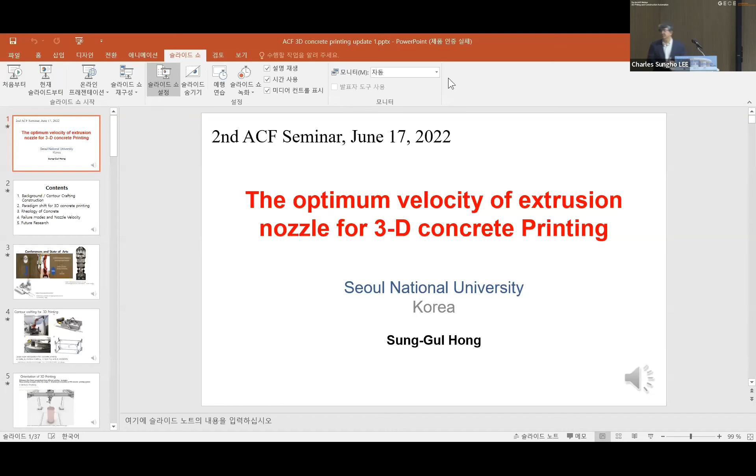Good afternoon, everybody. I'd like to talk about the optimum velocity of the extrusion nozzle for 3D concrete printing. This time, I'm happy to give you some of my research results in this ACF special seminar. My name is Sung-Gul Hong from Seoul National University.

My major interest in concrete technology is to develop high performance concrete, 3D concrete printing, and some functional materials. Today I'd like to talk about the following contents for my presentation, from the background to the future research of 3D concrete printing.

In these days, many interesting conferences have already been held. For example, Digital Concrete started almost 8 years ago. I participated in the second conference in 2020, held by Eindhoven University of Technology in the Netherlands. The conference gave us a lot of interesting technology in 3D concrete printing.

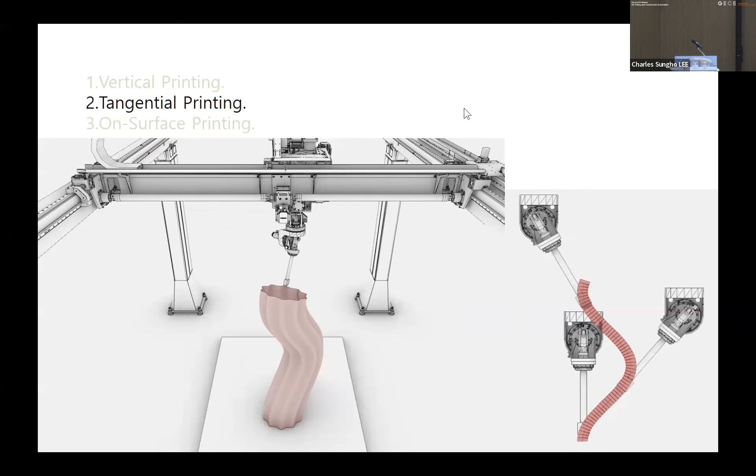Another interesting area is printing skill on curved surfaces—we need to print out to produce curved shapes of concrete material. In this case, we need to consider a more complicated problem of stability of the wall.

To solve the stability problem, we needed a paradigm shift from the normal paradigm of hardened concrete to fresh concrete. That means we need understanding of the rheology—what is the viscosity of the fresh concrete—because during 3D concrete printing, the concrete needs time to harden. That means hydration time is required to reach some strength, some stiffness. So this means a more complicated, more detailed consideration of the concrete material rather than hardened concrete.

So in the beginning of concrete printing technology, many people thought about what is the major challenge for applying 3D concrete printing in industry. They listed 5 main problems.

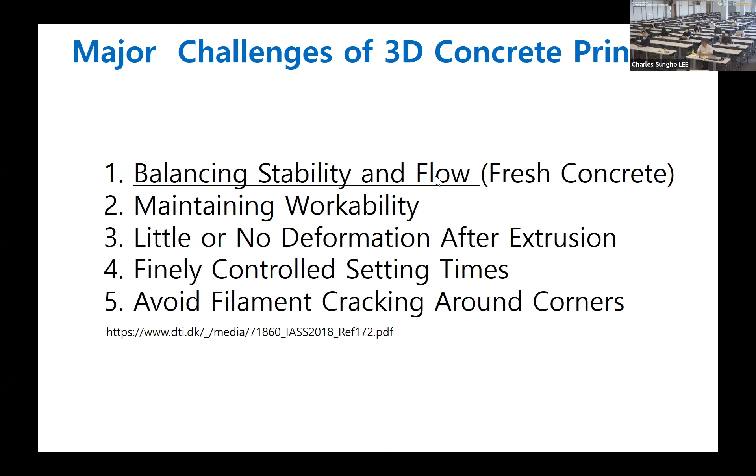So people started to discuss the stability problem as the main topic in this presentation. I'd like to talk about the rheology of the concrete.

Rheology is very unfamiliar to the ordinary concrete person, but for 3D concrete printing, we need to understand what is viscosity. Viscosity is expressed in terms of the shear rate and shear force, a kind of dynamic property.

Shear rate means the deformation divided by the height in this diagram. Up to tau zero, that is static behavior, no shear rate. After this point, flow begins, depending on the shear stress against the shear rate. The slope is defined by the viscosity.

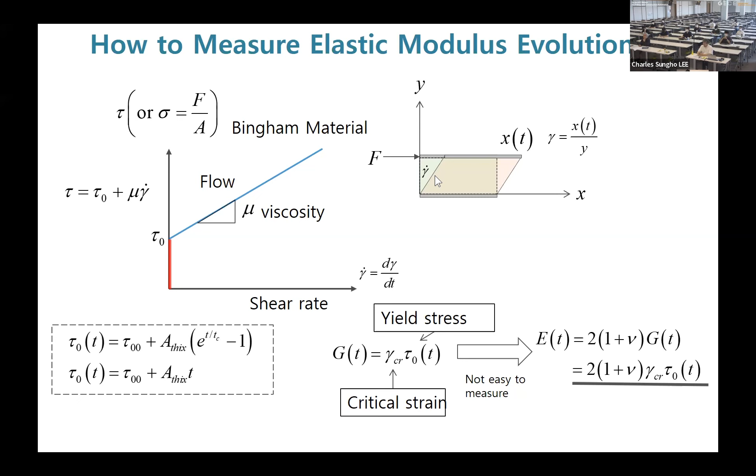From the shear modulus, applying this relationship, we get the Young's modulus. So from this equation, we can get the strength and stiffness evolution.

Here is a typical strength and stiffness evolution of fresh concrete in terms of the exponential function, with ATHX. ATHX means thixotropy, representing the total evolution of the rheological material, usually the concrete.

From viscosity and initial strength, we need to determine how much fresh concrete discharges at the extrusion nozzle. From the left side, meaning the inlet input of concrete under pressure, through some length of pipe, we assess how much fresh concrete discharges depending on viscosity.

Also, what kind of concrete affects this discharge. Here is a circular section of the pipe, and this is the center of the pipe. We have some plug flow, then some slope of the velocity profile expressed by the shear flow.

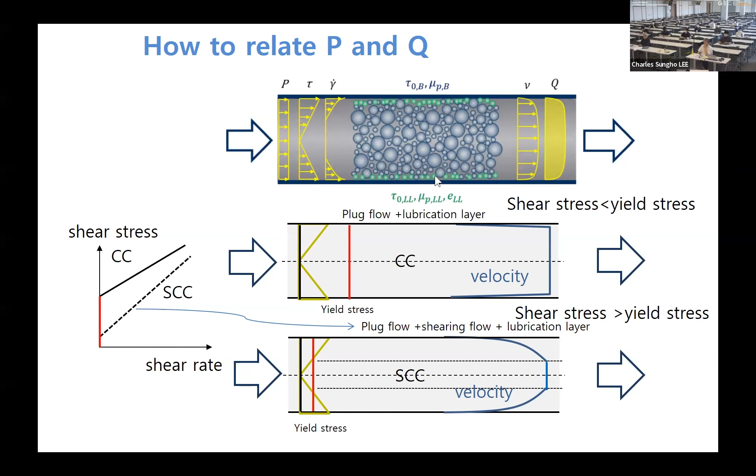In the case of only plug type and lubrication flow, we expect delta P, or Q, depends on P, but we need the initial yield stress and the lubrication flow contribution.

Another case is only the plug type; this term represents the plug type discharge.

How about the three different velocity case? That is the shear flow, the plug flow type, and the lubrication slip. So we have a little bit complicated expression between delta P and Q, giving us this complicated relationship here.

Let's move to the stability issue. We classify two types of wall shapes: one is the cylindrical or shell type wall, and the other is the rectangular wall, meaning just the plate type.

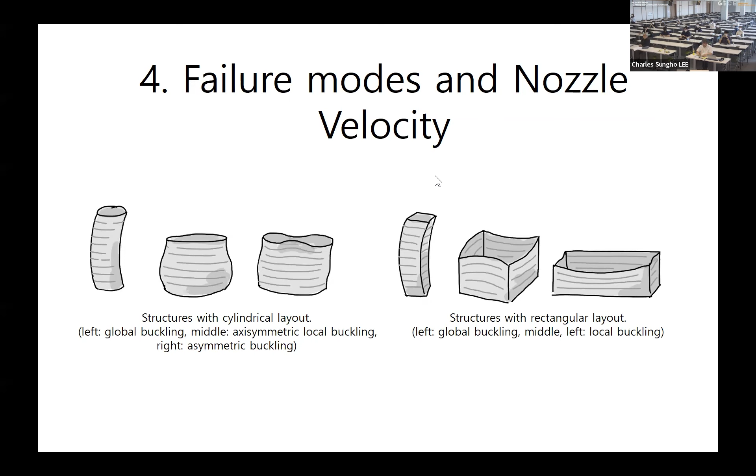These walls showed similar failure modes: global buckling, local buckling, and yielding of the wall at the bottom. In case of the plate type wall, the left side shows just buckling, and the picture shows yielding of the wall. In case of the shell, it has almost the same failure pattern of buckling and yielding.

To solve this problem and formulate the strength in case of yielding and buckling, we need an important parameter: the material property, meaning how much strength is developed and how much stiffness is developed. In case of yielding, we need the strength evolution in terms of a linear form for simplicity.

The yielding occurs at the bottom, and buckling is a more global phenomenon. We need to consider this kind of buckling shape, which can be drawn like this. But this problem also involves wall height growing over time, so we have to define an interesting parameter: the wall height growth rate.

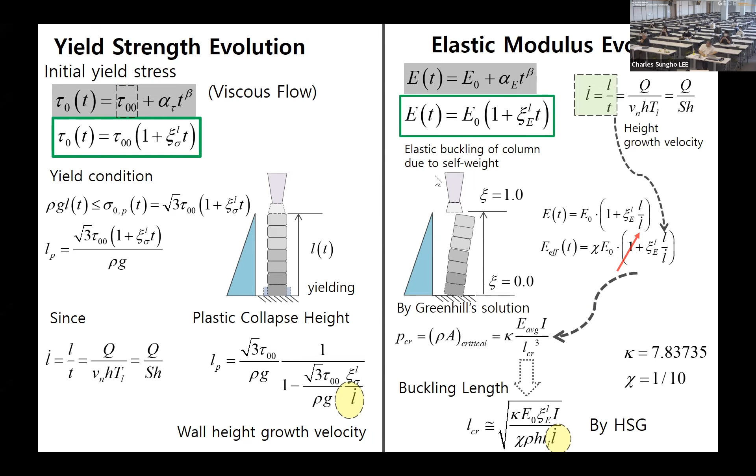We assume linear strength evolution and neglect the constant term to plug into this equation as a very approximate buckling height of the wall, expressed by this equation using modification factors kappa and xi. Xi accounts for the strength evolution, and kappa is a modification factor for the boundary condition and the elastic modulus.

Another important failure mode is the bond strength problem. In case of a very slow return period, this is not allowed because the bond failure between layers is very weak. So we have to assign a lower limit of the nozzle velocity.

To control the cold joint of the thin layer, we adopt the model proposed by previous research. The first layer is already placed here, then the second layer moves from left to right.

So tau equals mu multiplied by the shear rate. The shear rate is the nozzle velocity divided by the thickness of the two layers, giving an average velocity. That is tau xz.

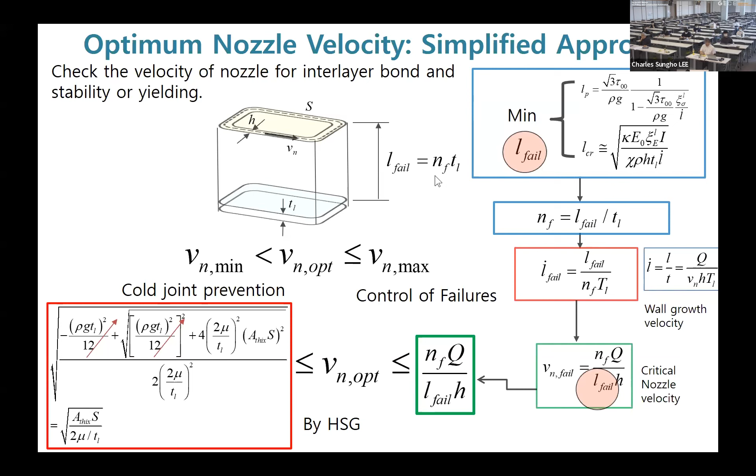Maybe we need a more complicated approach, the so-called plate buckling approach, rather than the column assumption. We assume plate buckling for the wall, restrained by elastic boundary conditions. So LC bar and LP bar take a more complicated form.

Anyway, we compare the two results using gamma. If less than this value, gamma is already given by some material property, so we determine whether buckling control or yielding control applies, whichever controls. Anyway, we can get the upper bound of the nozzle velocity.

This upper bound is controlled by NF and Q over the fail height of the wall, and also the width of the layer. Previously, for prevention of the cold joint, this equation was already derived. So the optimum nozzle velocity must be between the lower and upper bound, and this value must exist within that range.

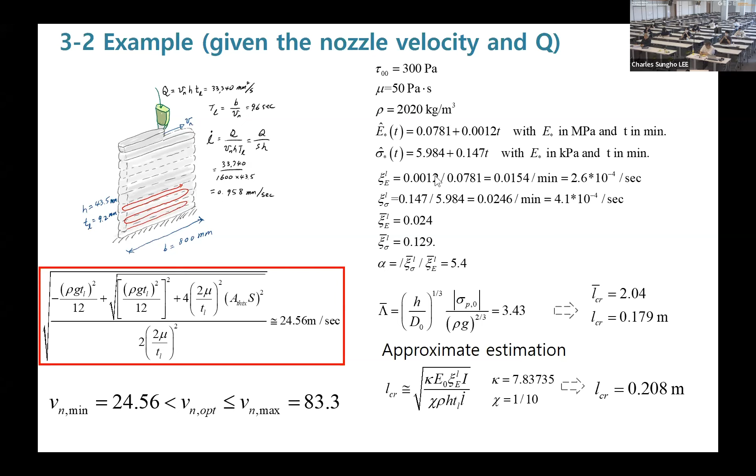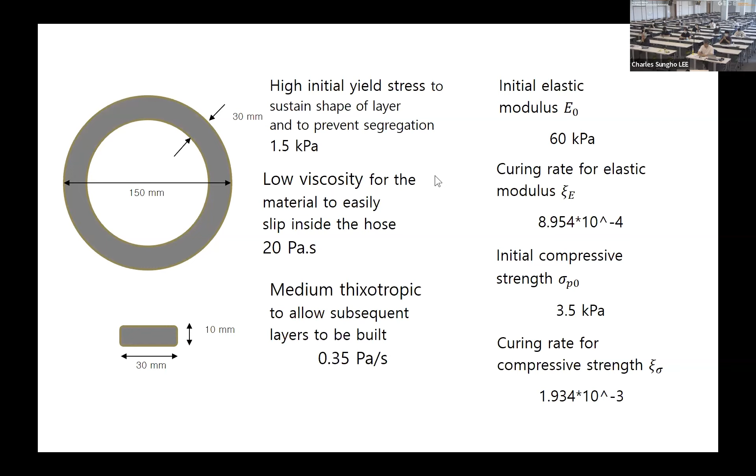So we applied some realistic case. The diameter of the shell is this value, and the thickness is 30 millimeter - so thickness is 10 millimeter. So we have the initial stress, the viscosity and the thixotropy here. So elastic modulus and the curing rate of xi E, and the initial compressive strength, curing rate psi.

Then we go to compare to the cold joint. We can have some initial design, or initial assumption of the velocity and the concrete discharge per second - discharge per second is acceptable.

Anyway, in this presentation we only focus on the stability problem, but we need more research on a large scale of 3D concrete printing to control more high quality. So we need some topology optimization. Also, we adopt robotics more aggressively to develop better quality 3D print construction.

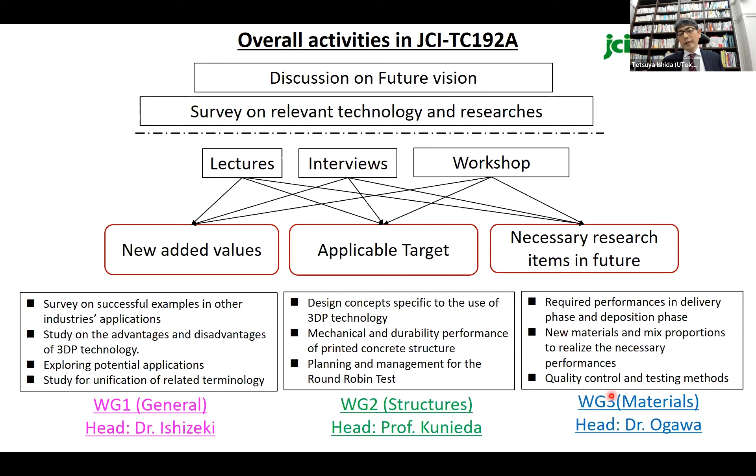Working group 3 focuses on material issues, headed by Dr. Ogawa of Taiheiyo Cement. In this working group, we try to clarify the required performance in the delivery phase and deposition phase for the material, and what new materials and mixed proportions are necessary to realize the required performance. Quality control and testing methods are also very important, so we discuss what new methods are necessary in 3D printing.

This JCI committee ended last year, so we are moving our activity to this JSCE technical subcommittee. I chair this committee, and these members are working as Secretary General and Secretary.

This committee started last June, and we plan to work for 2 years. We have 3 working groups: design and material print working, performance evaluation and quality assurance working, and contract standardization working.

The purpose of the committee is similar to that of JCI: survey of the latest information on 3D printing technology. We would also like to identify the problems in the construction of real structures using 3D printing technology.

For example, technology to control rheological properties and strength development, tensile reinforcement methods, performance evaluation, continuous material supply, securing structural stability, control at failure, etc.

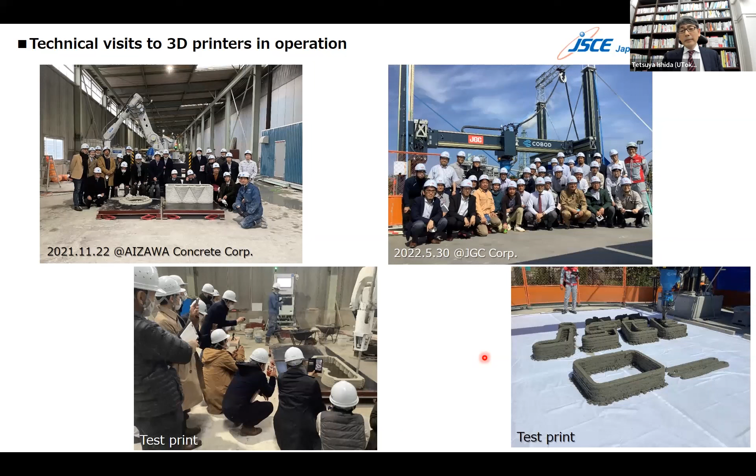Yeah, the COVID-19 situation has been getting better and better, so very luckily we can have this kind of event.

In this section, I'd like to introduce the 3D printing technologies developed by Aizawa, Obayashi, Maeda, Shimizu, Taisei, and Polyuse. Some of them very brief introduction, some of them I talk in detail.

And this is an example by Obayashi Corporation. This picture shows a shell type bench which is made with a special mortar for 3D printer and ultra high strength fiber reinforced concrete. Actually, this is self-compacting concrete.

On the left side, this is a Shimizu Corporation example. They fabricated a 3D printed concrete column, made with high performance fiber reinforced mortar outside and on-site casting, the combination of fiber reinforced mortar and conventional concrete.

And this is the concrete, printed concrete by Maeda Corporation. I think this is a smoking area.

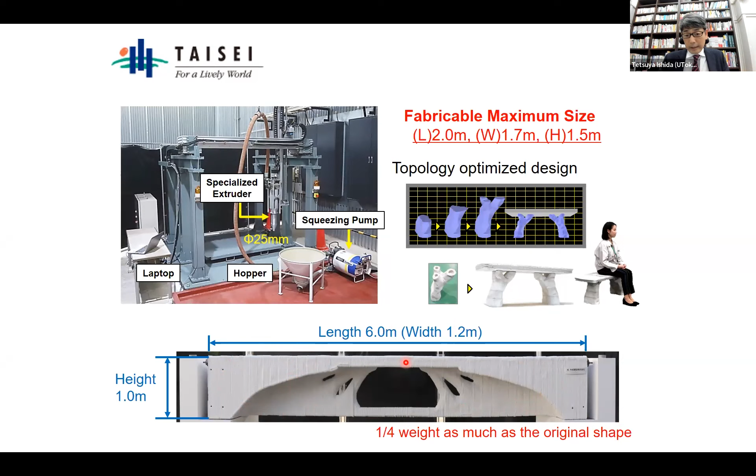Okay, I'd like to add some detailed explanation on each 3D printing technology. First one is the Shimizu Corporation. This slide is provided by Mr. Ura, thank you very much. And yes, this is the flow.

Firstly, they generate print paths on the PC. According to this generated print path, the fiber reinforced mortar is constructed like this. Their material has very high thixotropy, so they can form 2-meter height in 2 hours. And the next day, the concrete can be cast inside like this.

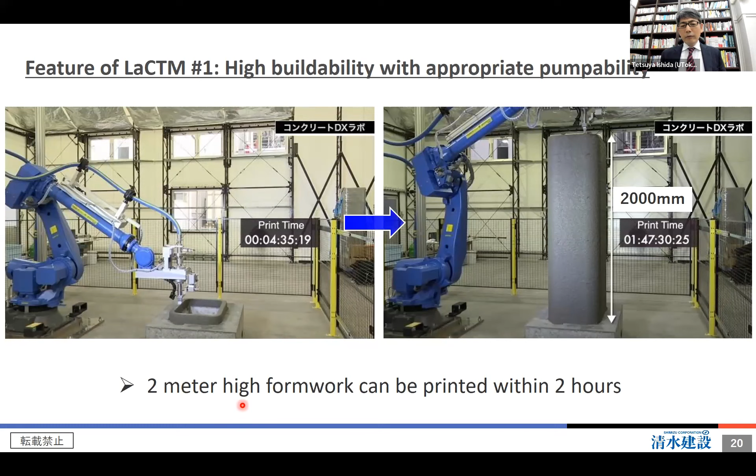The feature of this material is high buildability with appropriate pumpability. As I already mentioned, with very high thixotropy, a 2-meter high formwork can be printed within 2 hours. And this material shows very good, uniform quality.

So this is the surface. Usually, sometimes we can see some voids inside, like this, between the filaments we have some large scale void. But this is a picture of their material, and they cut the surface. You can see there is no visible void. So the cross-section seems to have no void, and this looks like very uniform material.

They conducted some water absorption tests. The left side is the 3D printed specimen, and the right side is conventional concrete. This test is called the surface water absorption test, SWAT, which was developed at Yokohama National University by Professor Hosoda, Dr. and some other colleagues.

In the 3D printed specimens, there's almost no water absorption, meaning a very dense microstructure, very good concrete quality is achieved. But in the case of conventional concrete, we have some amount of water absorption. This is usual, but in this case, very low water to cement ratio and very dense microstructure give very high resistance against water penetration.

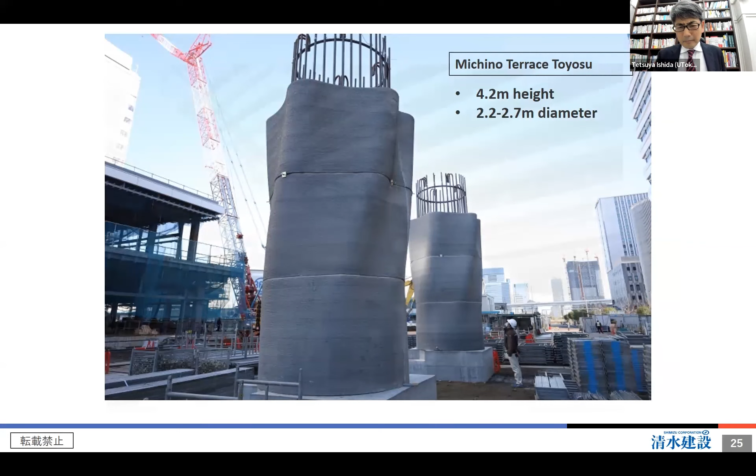So this is an example of that technology, Michino Terrace Toyosu. This is a pedestrian deck, and you can see the very unique shape of the column, which is very difficult to realize in conventional concrete.

Okay, next one is the 3D printing technology developed by Taisei Corporation. This is the introduction of their project. The background is that there have been a lot of studies, particularly on material properties and printing process in additive manufacturing and construction, but few studies have conducted structural performance testing on a large scale in a systematic manner.

This is their motivation, and the purpose of this study is a practical scale verification project in terms of structural performance. So they try to make this kind of beam.

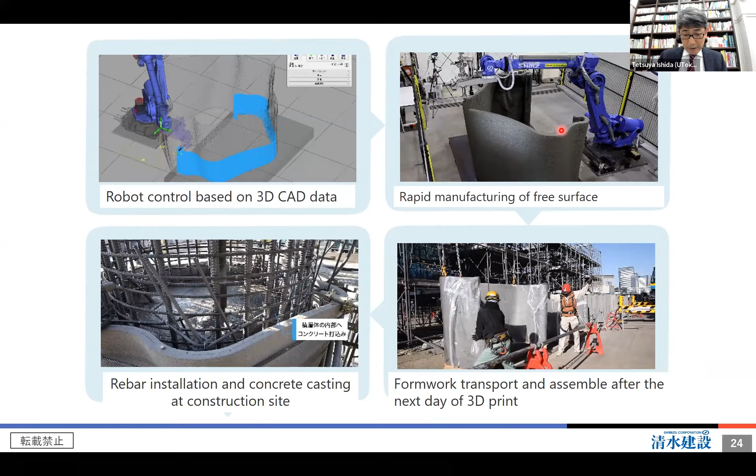Okay, so this is their printing system. I forgot to say, in the case of Shimizu Corporation, this 3D printer has been developed by their own technology, not imported from an outside company. And Taisei Corporation also developed their printing system by themselves.

And this is a gantry type 3D printer, and they try to use topology optimization. And this is a mixed design of their materials. The mixed proportion and types of binder or aggregate really depend on the company.

They use different materials. In this case, the mixed design is like this, using cement, ordinary cement, and supplementary cementitious materials, and some chemicals. And the fresh properties: mortar flow value after beating 15 times can keep about 170 millimeters for 2 hours, and this also shows very high thixotropy, so they can build this height within a short time.

As a preliminary element test, they conducted compressive strength, Young's modulus, splitting tensile strength, compressive creep, and drying shrinkage tests with core drilled specimens of the printed structure and normally casted concrete.

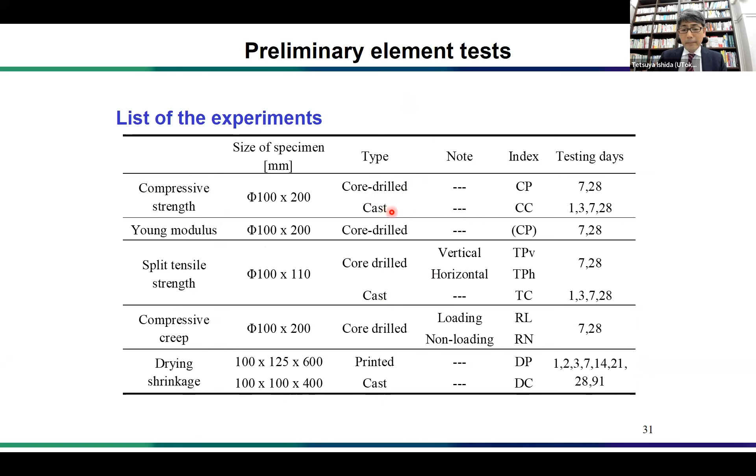This is a comparison of the compressive strength between the casted concrete and the core drilled concrete from the 3D printed members. The core sampling size is 100 diameter and 200 millimeter height, meaning this diameter includes 4 filaments, 4 layers.

From this result, you can see that casted concrete shows a little bit higher compressive strength compared with core drilled specimens. And also this is a splitting tensile test.

There are 2 series: this is vertical layer, and this is horizontal layer, and the loading direction is like this. From this result, casted concrete shows the highest tensile strength.

The second one is vertical - no, sorry, the second one is horizontal, in this direction, and the third one is the loading direction. So we can see this difference. And this is a compressive creep test.

And yes, this is a material test. By using such material data, next they design the beam by introducing topology optimization.

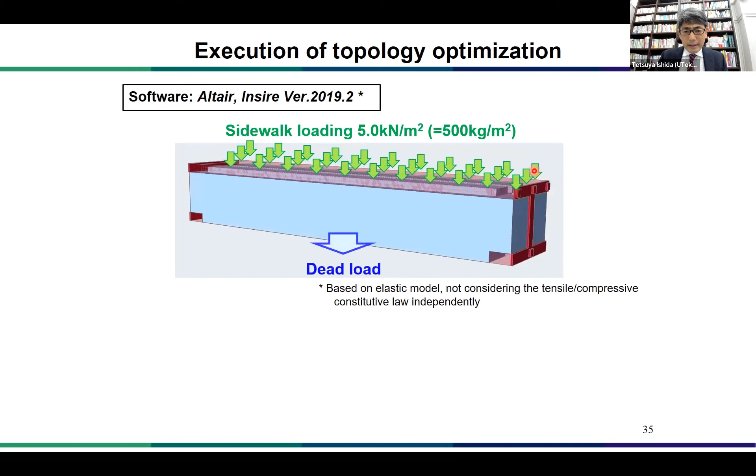But this part can be changed according to the topology optimization. They consider the external force and dead load and apply the PC stress, and can find the optimum design.

In this analysis, they just use an elastic model - no nonlinear constitutive law is considered, just the elastic model.

And finally, they can create this kind of girder with 3D printing, with a 3D printer. And next is a 3D printed pier - this is also very interesting.

In this case, similar to Shimizu Corporation, firstly they manufacture this formwork with a 3D printer, then concrete is casted inside, and finally they get this kind of pier column.

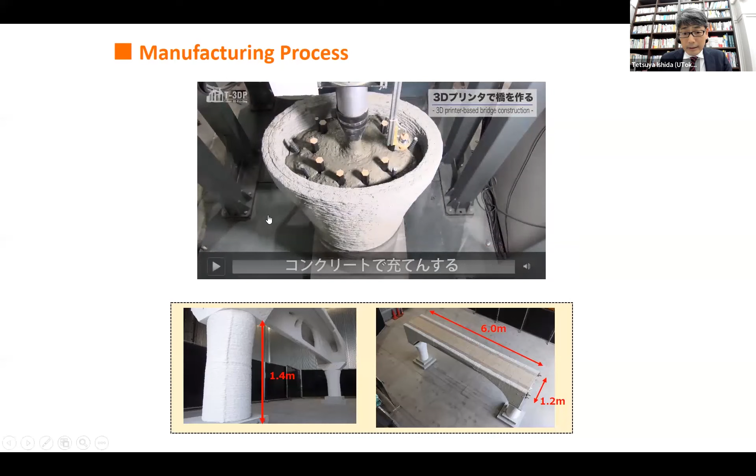Then this is a movie of the 3D printer, putting the rebar, and finally concrete is casted. And for this pier, a reversal cyclic loading test was conducted.

From this result, they realized that the outer shell and inner concrete behaved as a unity, not separately.

Also from this result, the uniaxial distribution of short fiber in the outer shell enhances the reinforcement for shear force, and also provides a confinement effect for the cover concrete, which leads to very high ductility in the case of the 3D printed outer layer. By using this kind of structural design, we can enhance the seismic performance, and I think this is a very promising technology.

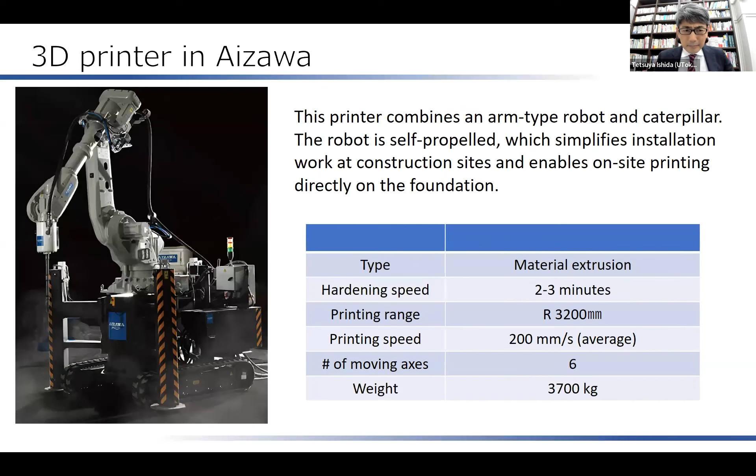Okay, the last one is a 3D printing technology developed by Aizawa Corporation. They introduced the SAIBI 3D printer, and as I already mentioned, they built this kind of toilet.

And this is the structure, and this is a movie of the printing process.

Yes, finally they built this toilet, and this is inside. They are also now planning to make glamping facilities with 3D printing. And this is a picture.

As a future work, they try to introduce new machines, and also propose a very interesting new technology that is a combination of drone and 3D printer. They call this a flying 3D printer. If this is realized, I think we can broaden the possibility of the construction process.

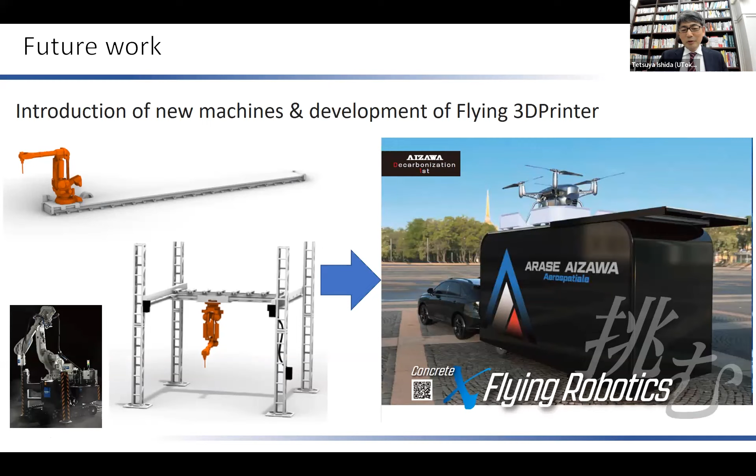This is the final one, an application example by Obayashi. This is a really new topic. Last week, they released this press news.

This is a shell-shaped bench, and this is a 3D printer demonstration building. In May this year, construction of the 3D printer demonstration building just began. It has undergone performance evaluation review by the Building Center of Japan and has been certified by the Ministry of Land, Infrastructure, Transport, and Tourism.

A 3D printer will be installed at the construction site to print the walls, the slab is constructed, and it's filled with slimcrete. This is also their own developed material, self-consolidating, self-compacting concrete, very high strength concrete. So it's a combination of 3D printed material and high strength self-consolidating compacting concrete.

This is a multi-layer overview of the structure. This is a 3D printed concrete member, this is an insulation layer, and this is the equipment layer. This is also very unique.

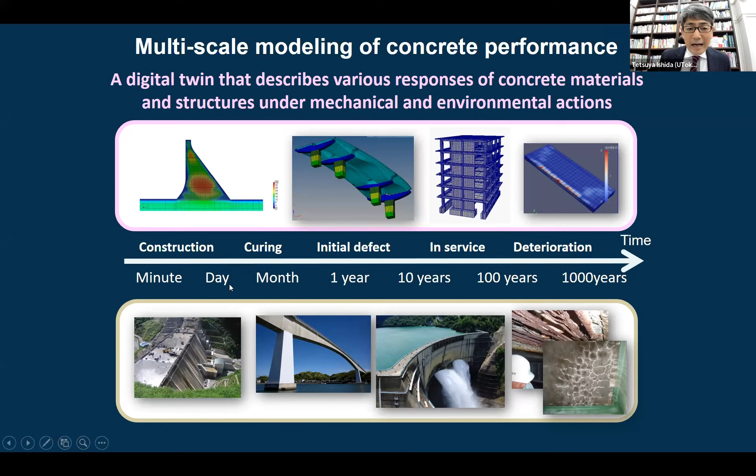Our core technology is numerical modeling and numerical simulations. I have been working with Professor Maekawa and Professor Okamura, and we have been developing this kind of numerical multi-scale modeling, multi-physics modeling. By using this technology, we can simulate the performance of materials and structures from the very early stage to the long-term deterioration process.

In my opinion, I'd like to combine this kind of numerical model with 3D printed materials, but due to the limitation of time, I'm going to skip this. This is also interesting, but I may need to skip it too, sorry.

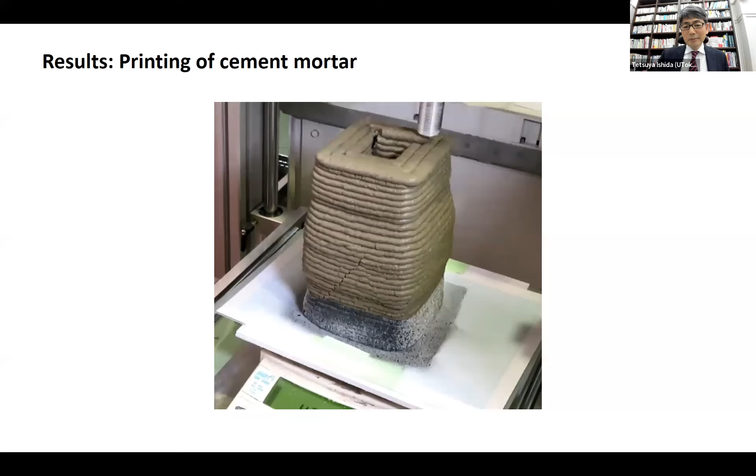In this project, we use DIC, digital image correlation. By using DIC, we can very nicely detect the sign of collapse of 3D printed materials, like this. With the naked eye, we cannot detect the defect, but DIC can detect it. So we think we can use this kind of technology in a real-time monitoring system.

We now also develop metamaterials with 3D printing technology. What determines structural performance of concrete? Of course, it depends on material properties and structural dimensions. With regard to material properties, we have many possible combinations, like types of binder, aggregate, or fiber. But with regard to structural dimensions, the possible shapes and sizes are limited by formwork. Therefore, higher freedom of structural design would broaden the possible range of structural performance.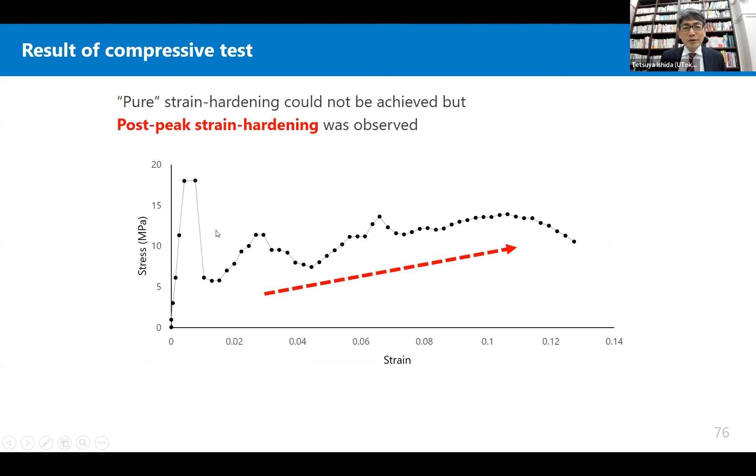We try to make this kind of very unique structure with cementitious materials, and we apply the load. Then we can see very interesting results. Of course, pure strain hardening could not be achieved, but post-peak strain hardening was observed by making this kind of structure.

Firstly, we have a crack like this, then stress reduces. But after that, holes close, then stress increases again. Then we observe the next different crack, and again holes close, then stress increases. As a result, we can achieve very high energy absorption.

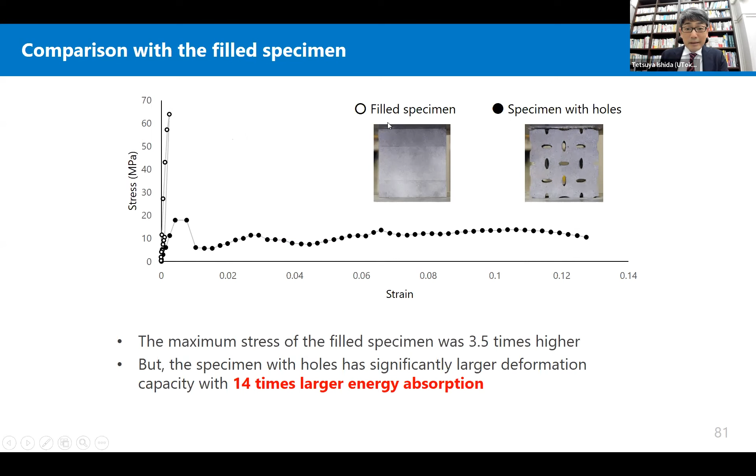This is a filled specimen, and this is a specimen with holes. This is really a preliminary study, but by changing the internal structure with a 3D printer, we can create new materials, and we'd like to realize this metamaterial in the future.

I'm sorry, due to the time limitation, I cannot finish everything, but thank you very much for your kind attention. Thank you.

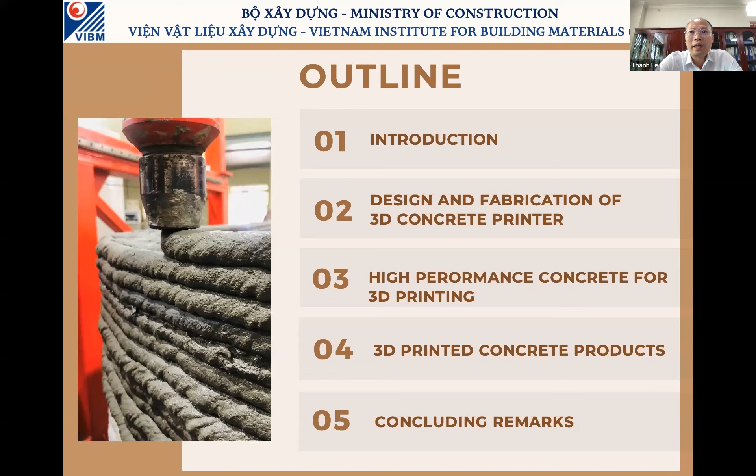In this presentation, I'll bring you 5 contents. The first is a very short introduction, then I'll move to the second content on design and fabrication of a 3D concrete printer in Vietnam. The third part is high performance concrete for 3D printing. The fourth content covers some products we've printed using our 3D printer with high performance concrete. And lastly, we'll have some concluding remarks for discussion.

VIBM, the Vietnam Institute for Building Material, was founded in 1969, and we are a National Science and Technology Research Institute in the field of building material, construction material, construction environment and infrastructure. We assist the state management and nation-wide development of the building material industry, construction environment and infrastructure for the Vietnam government, directly under the Ministry of Construction.

So concrete research is one of our key research areas.

Basically, 3D printing is an additive layer-based manufacturing technique. You might already know some very basic steps for 3D printing. The first is 3D modeling - objects are designed using 3D modeling software, which is very popular now. Then it needs to be formatted as an STL file, giving information on coordinates and boundaries. After that, it should be sliced into layers with the same height, converted to G-code, and transferred to the printer for printing the material. The material should be high performance concrete, extruded and bonded in layers to form the object component.

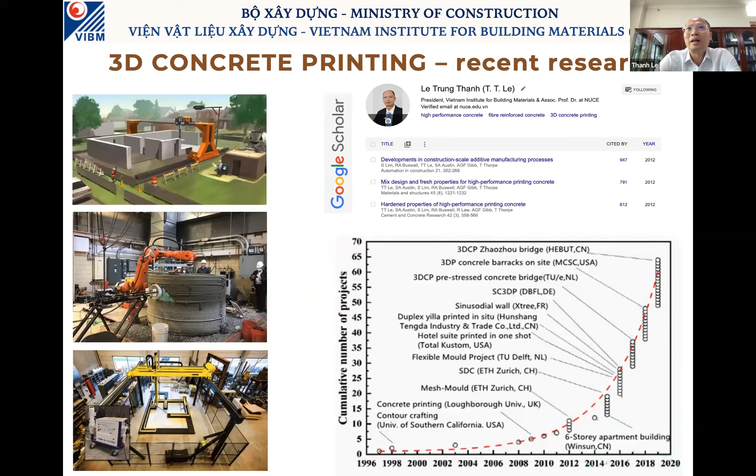We agreed with each other on some key points for designing a concrete 3D printer: it should be a large 3D printing system using a gantry system to control the position of the nozzle according to the X, Y, and Z coordinates, using concrete 3D printing technique by extruding cement concrete material through a nozzle to print concrete layer by layer. This type of design is basic, simpler, more powerful than other options, easy to manufacture, and uses locally available components.

It can reduce the cost when building at a larger scale rather than a robotic arm. We understand that the robotic arm, which some research centers use, is very precise, but we doubt its scalability. With the robotic arm, it's very hard and inconvenient to print larger scale construction structures. So we went with the 3D gantry printer.

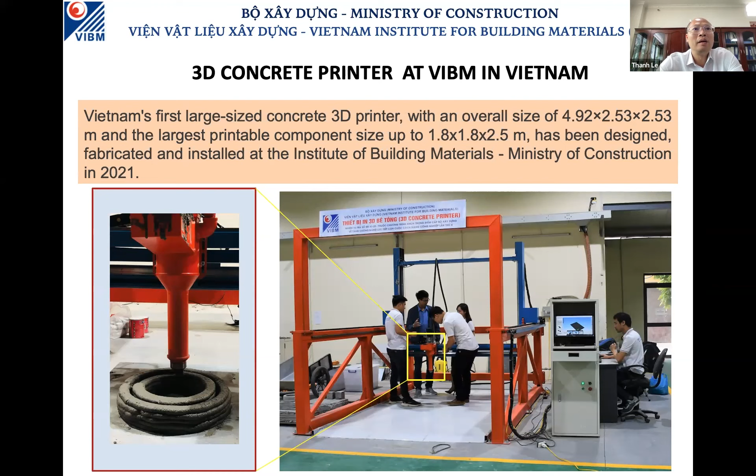We also have a control box with our own developed software, though there is some available software in the world already. We started to design components and print some of them.

Now we move to the second part, to introduce the high performance concrete for 3D printing. We use readily available normal raw materials, including cement PC40, and also PC50. Different from other countries like those in Europe which use 52.5, in Vietnam we use 50 and 40.

We use sand with a maximum size of 5 millimeters, and we also tried a maximum size of 2.5 millimeters. We also use silica fume and fly ash, which is available in very large volume in the Vietnam market now. For chemical admixtures, we tried several different ones, but we settled on one of the Sika admixtures.

The mix proportion was optimized based on some very basic criteria: workability, open time, strength, extrudability, and buildability. If you have read the paper we published 10 years ago, we define what buildability, extrudability, and open time mean. We all know that 3D concrete is a really challenging type of concrete because it should have very good fresh properties for extrusion, but it also needs good buildability.

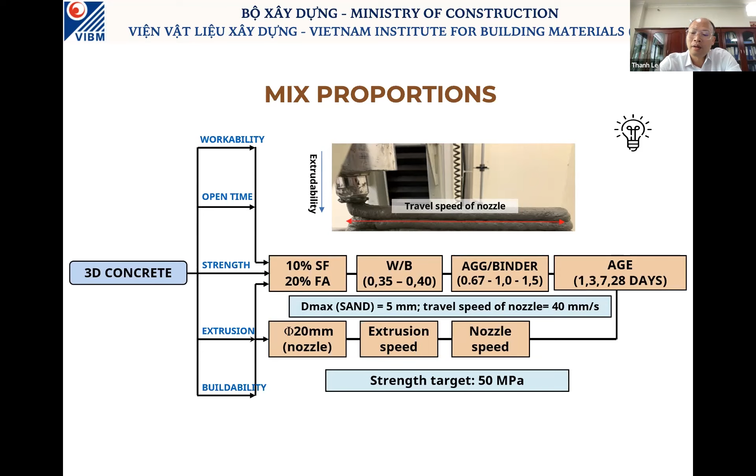The strength target was 50 megapascals.

So the method of research here, we do a lot of buildability tests. First, we use a mortar, a small mortar with a compression machine. We use equipment we developed ourselves, designed and fabricated in VIBM with a piston system, which is a simulation system consisting of a compressor and a piston to test buildability.

We did a lot of different mix proportions for optimization. We mix this, measure workability, and then put it in our measurement system for buildability. This is a piston system, a small piston.

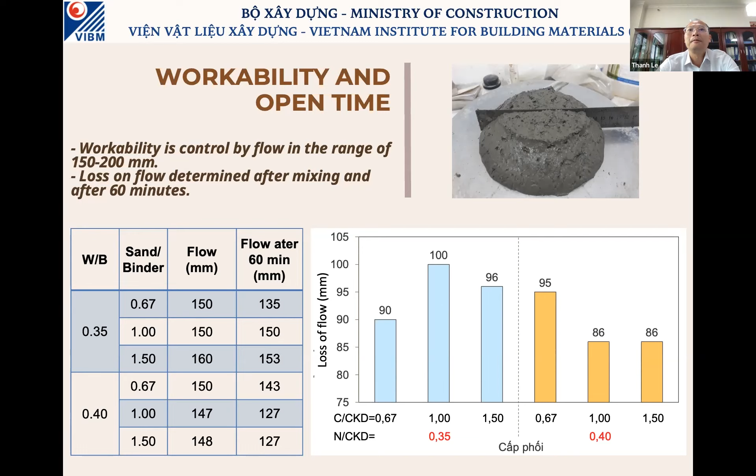For extrudability, we try to optimize by variation of speed of the nozzle, with extrusion speeds of 40, 60, 80, 100, 120, 140, 160, and 180 millimeters per second, with 20 millimeter per second intervals. The nozzle diameter we test using 20 millimeter diameter. Some mixes are not really good, and finally we find some mixes have good extrudability. The extrusion speed should be 100 to 140 millimeters per second.

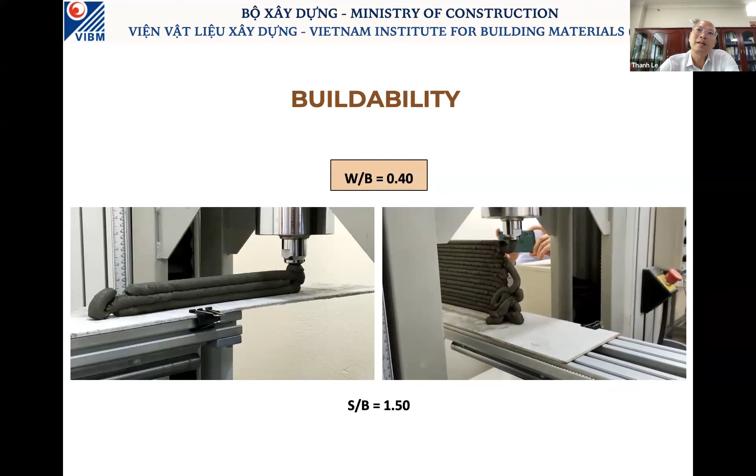You can see a short clip showing we test buildability with only one single layer, one single bead, and it can build with different layers using different mixes.

So the buildability with water binder ratio 0.35 mix also has good buildability, but not really a smooth surface of filament. With 0.4, quite good buildability and smooth surface of filament. So we select water binder ratio 0.4 for testing in the real printers.

Also, as I mentioned, we vary the ratio of sand and binder, and we also found that they have quite good buildability, but a lower sand binder ratio gives good binding between filaments and a smooth surface of filament.

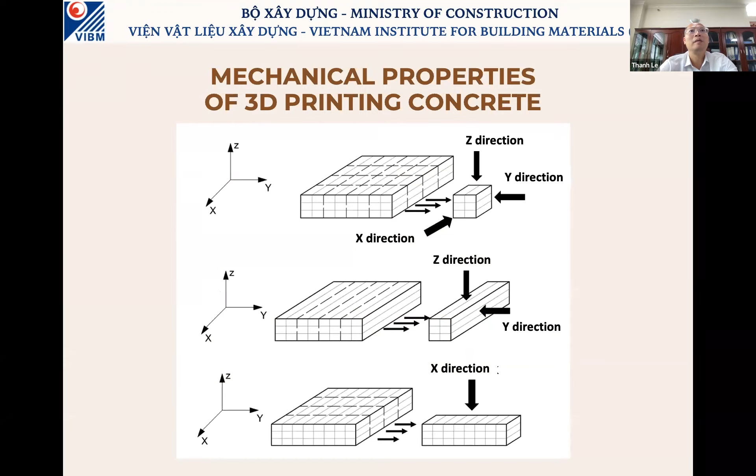So we use the big printer for printing a number of blocks like that to test different directions of concrete printing. Here is one of the blocks we print using our printer.

After being printed, the block was cut to make a number of cubes and beams for compressive strength test and flexural strength test. We also print a number of blocks and cut them to make samples for bond test, applying tensile load to determine the bond strength between layers.

We also print and measure a number of specimens for drying shrinkage. So you can see on the screen the cube, the beam, and also the tensile bond strength test, with the specimen shown in the lower right corner pictures.

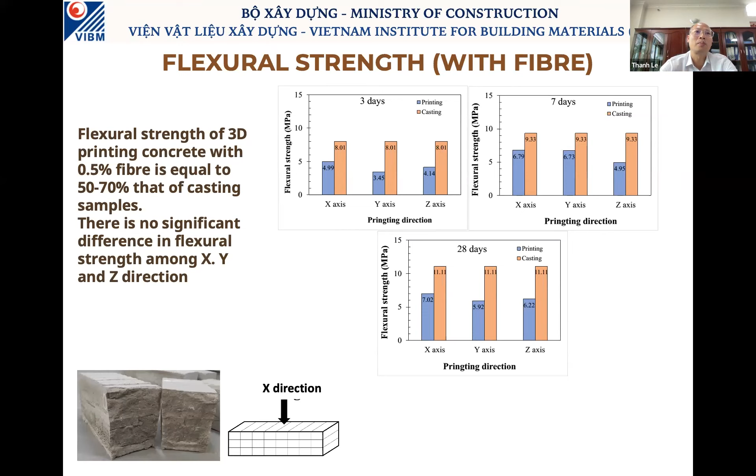We also measured drying shrinkage and compared the printed specimen and cast specimen, and found that the results were quite similar up to 28 days. When we add fiber at 0.5% and 0.7%, the drying shrinkage improves, meaning the value is lower than the non-fiber specimen.

So we have a printer. We also have the high-performance concrete. Then we did a number of printing with different products.

The first one we tried with the curvy chair, and we were successful printing this curvy chair. It's just one single bead, so actually it's not really strong. That's just a model to show how our printer can work for a curvy object like a curvy chair. The height is 1 meter, and the width of the chair is 0.65 meters.

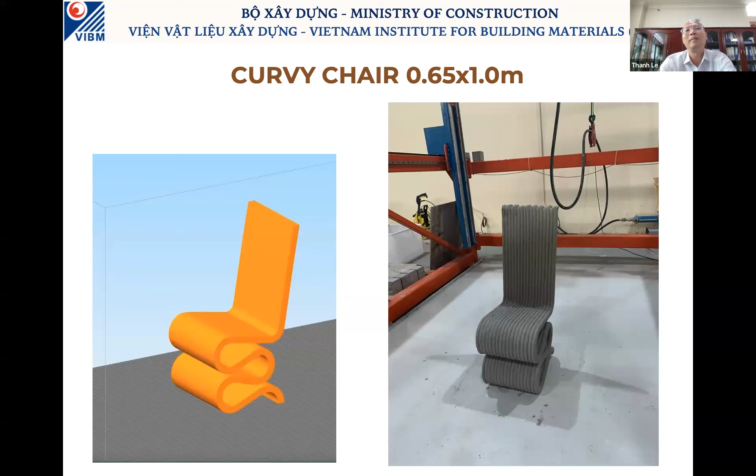And we move to another more complicated shape of objects that we print. We try to print curvy chairs and a table with a size of 1.9 by 0.7 by 1 meter, and this you can see here.

We did 3D modeling, then we sliced the object with our software, and exported it as a G-code file for the printer. And so we completed the printing of this curvy chairs and table, and it's strong enough to carry 2 persons at the same time.

And it is now in VIBM. Hopefully one day some of you will visit us, and you can visit on site in our institute.

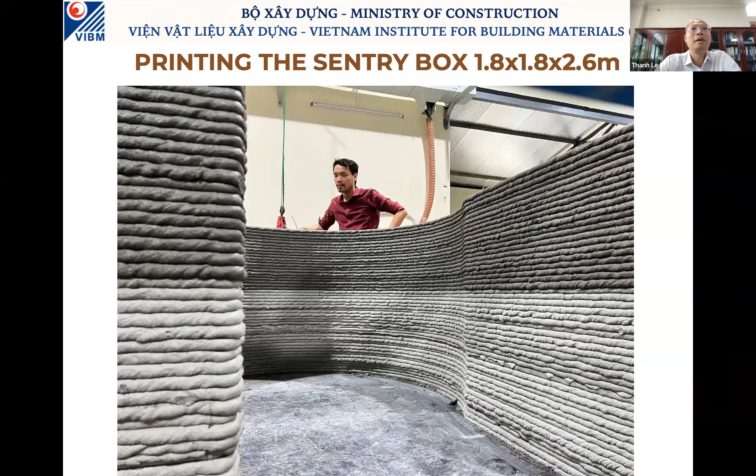So these are some pictures showing the components we printed. This picture shows how we moved the 3 different components outside of the laboratory, and we did assemble the 3 components.

The high performance concrete is strong enough that even the component you see here could be moved and rotated outside of the lab, with a very simple cable and crane motor. We were successful in assembling the 3 components with each other. Here you can see the complete sentry box, which is what we did in VIBM.

Anyway, I will show you a short movie about what we have done, and maybe you will have more understanding about what we have shown here.

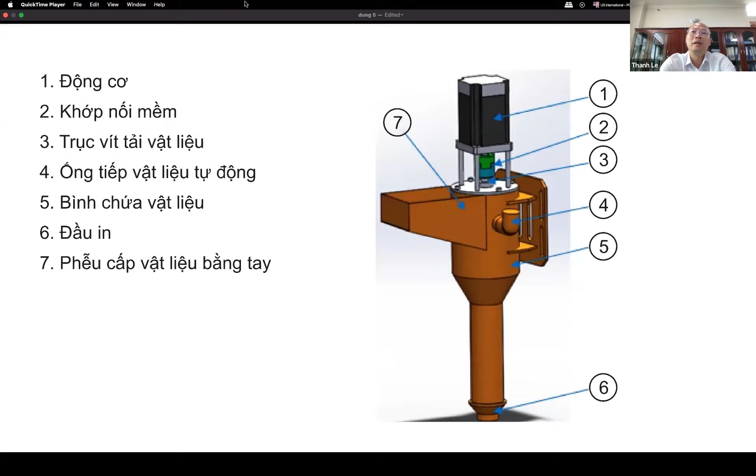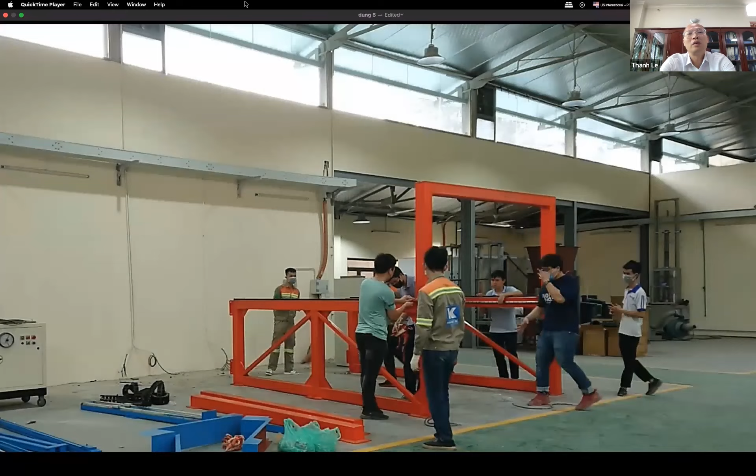It's a Z-axis we designed. It's an X-axis with the nozzle mounted on the X-axis. It's a nozzle design, mounted on the X-axis. This is a control board we designed. Frame fabricated in the workshop. This tests durability. System testing. Assembly.

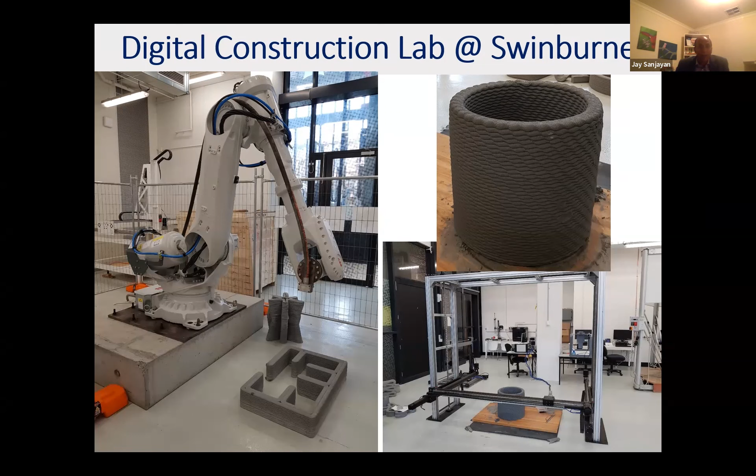This is the reason we started this digital construction lab at Swinburne University of Technology. We are in Melbourne, Australia. We started with robot printing, 3D printing, in 2016. We started at small scale, but now we have grown to a big group of people, and we also have a large 6-axis 3D printer. So we can print about 8 meters long, 6 meters wide, and 4 meters high. We haven't printed anything that big, but we just got the capability.

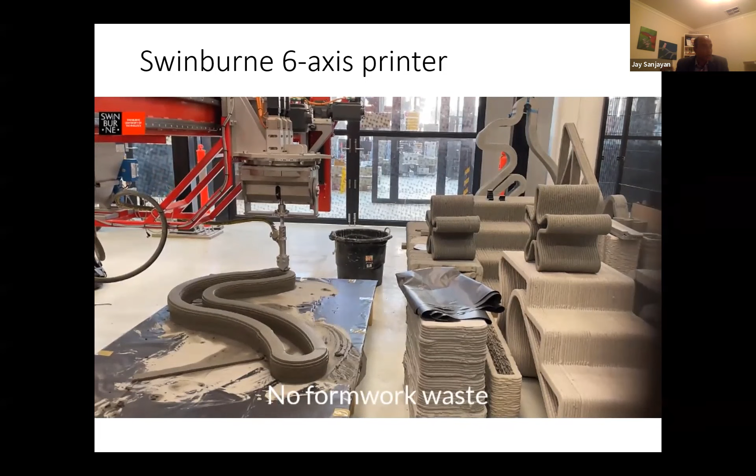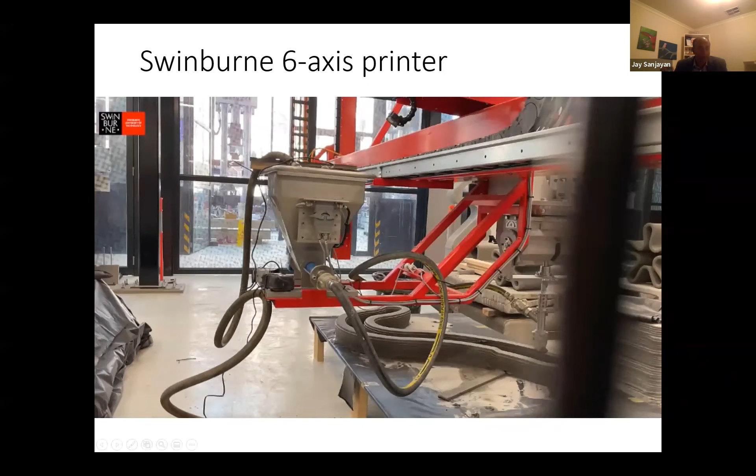But most of the work that we are doing is research, so it requires small size printing. The main advantage, as others discussed, is there's no formwork waste. Formwork constitutes about 60% of the cost of concrete construction, and also constitutes significant waste. We still use a lot of manual methods to 3D print. This is our mixer - we mix it, and then it's printed on this side. We pump the materials near the 3D printer, and then we mix it again and print it.

We organized the first international conference, initiated in 2018. At that one, most of the people in the world working in 3D concrete printing were there.

The second international conference was held in Tianjin in 2019. Then COVID came, and we did not have the conference for two years. But the third international conference in this series is actually starting tomorrow, in Shanghai, tomorrow and the day after tomorrow.

We have a very active program in China on this topic. There's a lot of activity going on in China. We have a collaboration with Hebei University of Technology. For the second international conference, we printed this bridge at the university campus, a 20-meter span. The opening was during the conference.

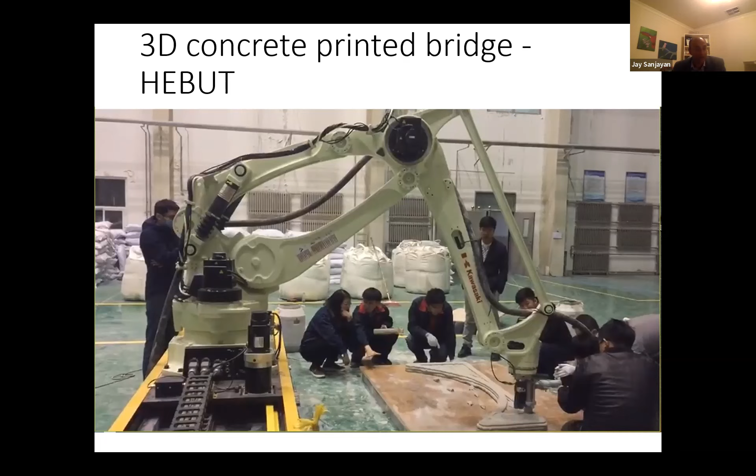In the process there were so many issues. They ended up building the bridge a few times, about two times, to finally get it right. So one of the main issues in 3D concrete printing is the buildability.

The yield stress follows a Bingham model, where it changes with shear rate as well, but that is not that important—that's only important for pumping. If we increase the yield stress a lot, then it's difficult to pump. So it's a compromise we have to make.

The rheology of concrete is an important way of improving the yield stress, but there's a limit—we cannot increase the yield stress beyond a certain point, or we cannot pump the concrete. The other option is to have a fast setting concrete, so the moment it comes out it sets, and the yield stress can improve very quickly.

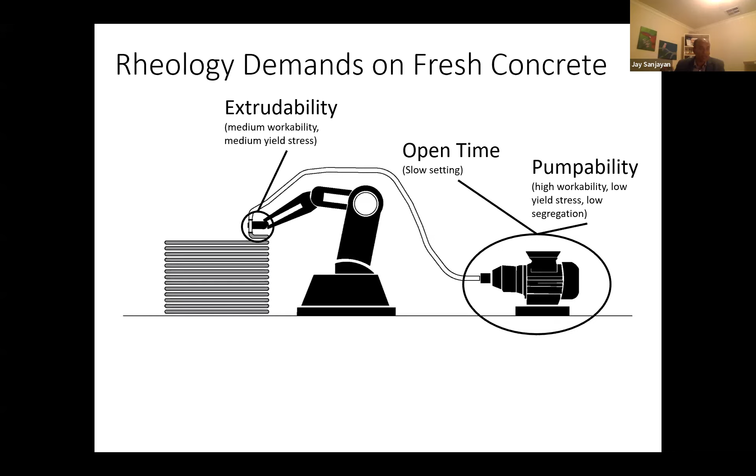The other requirement is extrudability. For the concrete to be extrudable, it should have some medium level of workability. If it's too flowing, the concrete will come out as a fluid and won't get extruded. So it should have some yield stress, a medium yield stress.

But then to get buildability, we need high yield stress and fast setting. So we actually have contradicting demands: here we want low yield stress, here we want high yield stress. How can we achieve different requirements from the same concrete?

So there is a contradicting rheology and setting time demand, and also if we stop the 3D printing at any point—say to take a lunch break—we need to clean everything before we can stop even for a few hours. So one of the best solutions we think is an active rheology control, meaning we control the rheology at different positions using different technology.

One of the things we are investigating is short duration near-nozzle mixing. The nozzle is the print head where the concrete comes out, but we mix the concrete near the nozzle so there isn't a lot of pumping distance. We bring the water, liquid additives, and dry materials, mix it there, and print it.

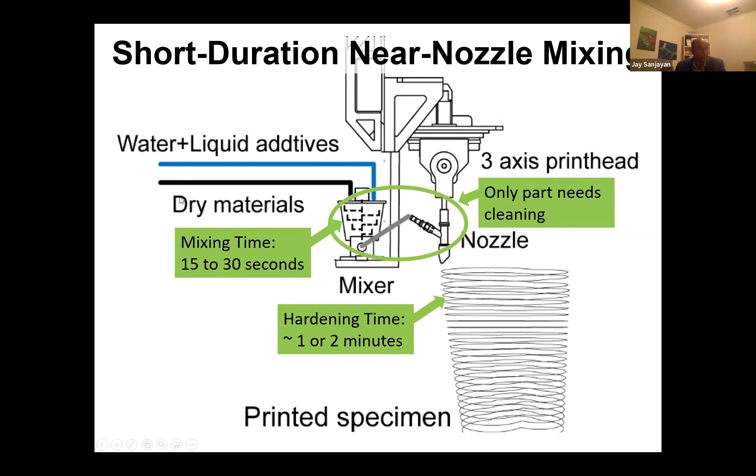with this technology, if we need to stop the concreting, we only need to clean this part and take a break or come back tomorrow and start again, because all the dry materials and wet materials come to this, they don't need to be cleaned. So this is the main advantage of this

technology that we are currently working on. But normally we mix concrete about 5 to 10 minutes in a big efficient mixer. How can we change that to 15 seconds? That means we need to understand what are the parameters to improve the mixing efficiency.

The mixing is a field of concrete that has not been studied in the past. So we have to go back to fundamentals and start to understand what are the parameters that we need to improve so that mixing can be quick and at the same time have high quality mix at the end, because we don't want to compromise the mix quality because we did not mix long enough, or we only mix for 15 seconds.

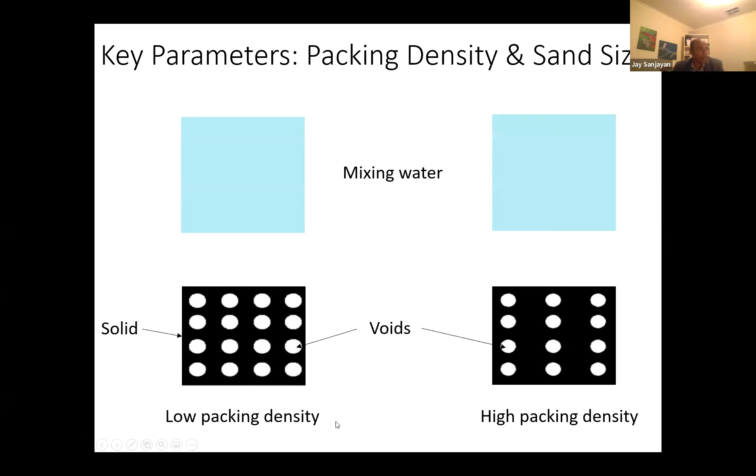mixed designs, and what we found was the packing density and sand size, that is the key. So when you have low packing density, that means we pack the solids without the water, and then we add the same amount of mixing water. The excess water that's remaining is a lot more for concrete that has, or the solids content that has high packing density. That means you have more water for mixing, so you get a better efficiency.

So this is what we found. We could improve or reduce the mix time without compromising the quality of the concrete by having a high packing density.

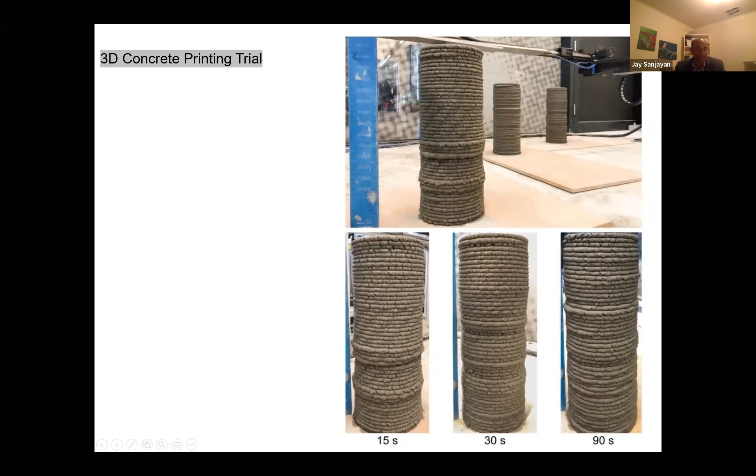Because when we mix for 90 seconds, the concrete starts to set, the yield stress is too much, and it gets cracking, it's harder to extrude. And when it's 15 seconds, it's not sufficient mixing. The quality is also not good.

The other method that we tried for active rheology control is we place a very stiff concrete using some conveyor or belt or some other methods, not pumping, because we cannot pump the concrete. And then we use a vibration. And the vibration makes the concrete yield stress reduce and makes it become extrudable concrete.

And that can only happen to concrete that is thixotropic. Thixotropy is a rheological property that means when the concrete or material is vibrated, it starts to flow. And when you stop vibrating, it becomes stiff. So because we are vibrating, the concrete starts to flow and we can extrude it.

Then as soon as it's extruded, it's not vibrated, and it's going to regain its stiffness.

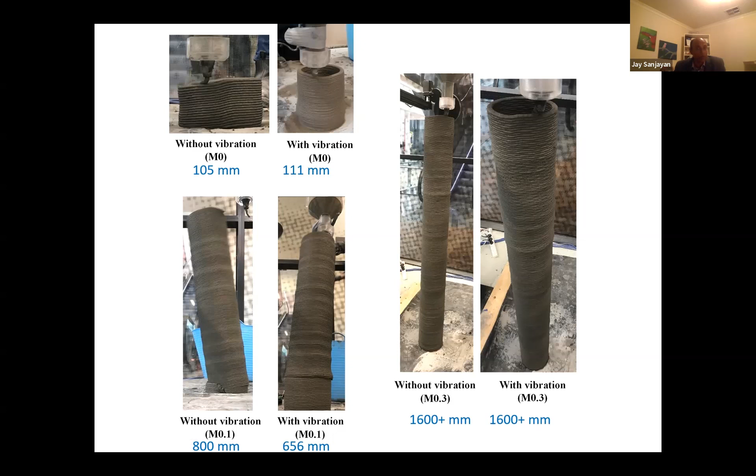So this shows the effect of active rheology control. Here, this is the 0% nanoclay, unvibrated, vibrated - no big difference. At 0.1%, there's some difference.

We cut the concrete and looked at the photographs. So when you don't vibrate a thixotropic concrete, you are not going to have good adhesion between the layers. The vibration is essential for the concrete to start to flow, and it will get good bonding, but at the same time we can have high stiffness concrete. So that is active rheology control.

The other technique we are using is mixing at the nozzle using geopolymer concrete. By adjusting the activator - I hope most of you are familiar with what geopolymer concrete is - it doesn't use any cement, it uses only fly ash and slag, and we can put very high levels of activator, mix at the nozzle, and it can go hard very quickly. By using that, we can almost print horizontal with very little sag.

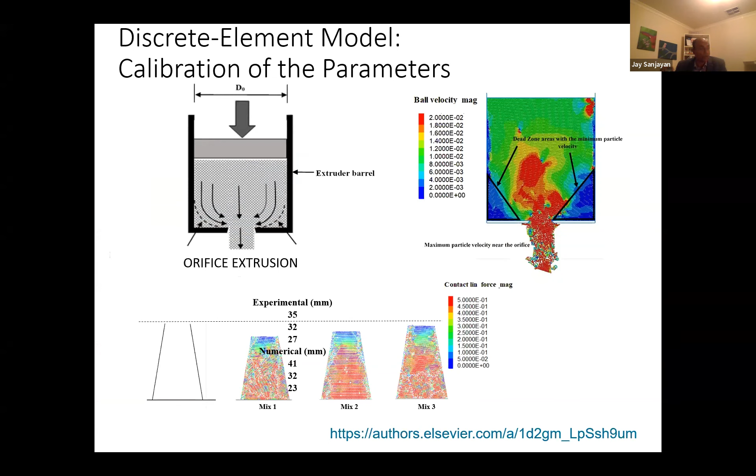Now, the other issue is reinforcement. Reinforcement in 3D printing is hard. A lot of people are using fibers like us, but we came up with an in-process mesh reinforcement method. So we put the reinforcement as we print.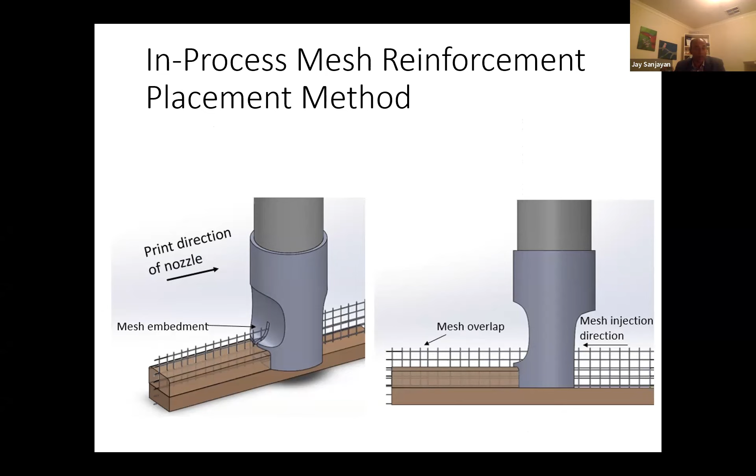So this shows how this is done. The mesh is printed, and then we print the second layer. We published a few papers on this. With this technique, when you finish printing, it is the same as continuous mesh.

The other technology that we have also done a lot of work on is powder bed 3D printing. So the powder bed is - we lay cement, sand, or in this case, we also printed with geopolymer.

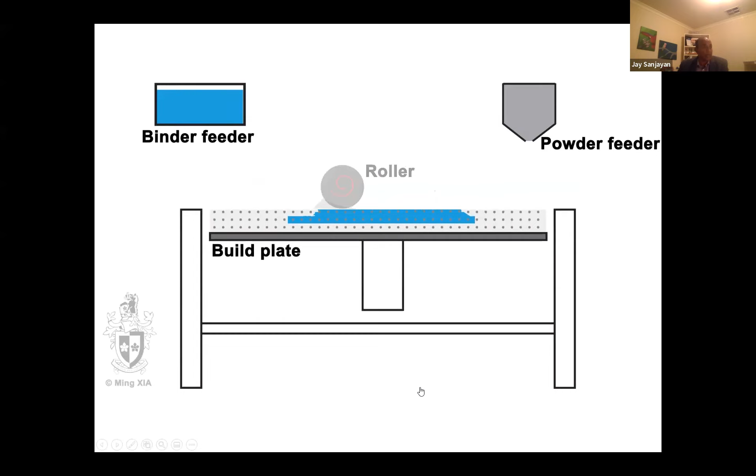We print the powder, we lay the powder layer by layer, and then the ink - we print like we would normally print in an inkjet printer, but the ink is water. So we print the water and ink layer by layer. The layers are only about a millimeter thick. So we can print very intricate shapes, and overhangs and other things are not a big problem.

We can print any shape. But the main issue is we end up with a lot of dry powder that we need to recycle.

And this is what we end up printing. It would be very difficult to print with the extrusion method. With this method, the main issues are the binder droplets, and we have to model how far they penetrate. If they penetrate too far into the previous layer, it's not good. If they don't penetrate enough, it's not good either. They should be just sufficient to penetrate that part.

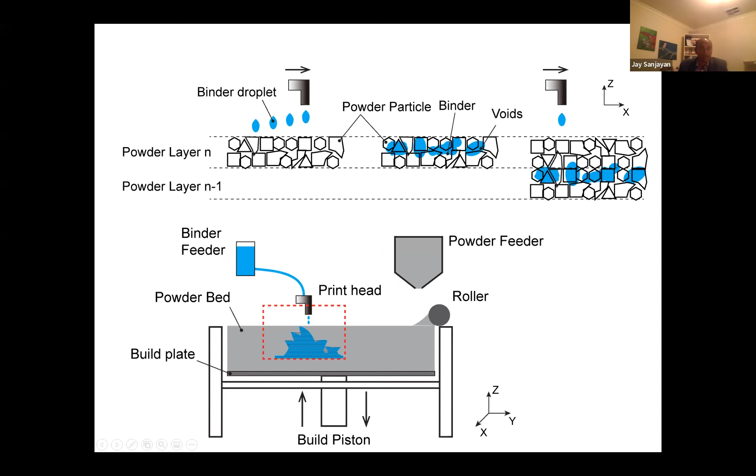So we did some work with a high-speed camera to characterize the droplets, how quickly and how many microseconds it takes for them to penetrate into the powder bed. Based on that, we can optimize the powder particles, which is important because that needs to be matched to the water, or the ink.

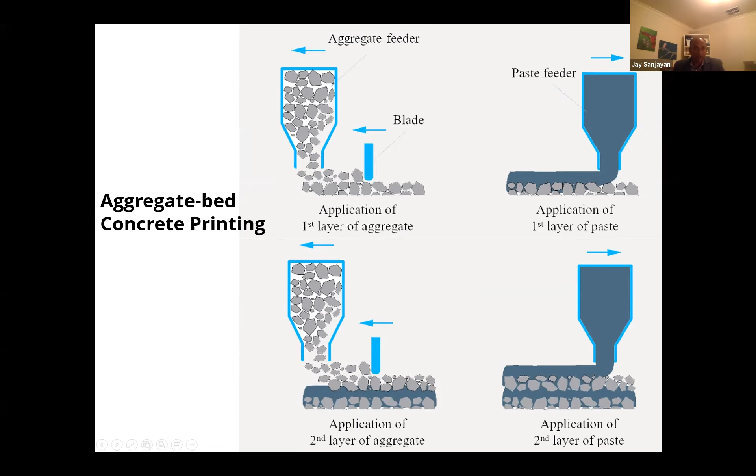We also wanted to do it with larger aggregates. So we use large aggregates, and the feeder was paste, which is cement and water. The cement and water get mixed and relayed. So the ink is your paste, and the aggregate is the bed. So you can see this.

We are extruding the paste binder, and we do it layer by layer. Then we finish printing, and this is what we printed using this method. It's early stages, but this had an aggregate content of 40%.

So the problem with this is the aggregate size is going to decide the resolution.

We also are printing with ultra high strength concrete, which has a very high flexural strength, about 37 to 40 megapascal. The compressive strength is about 120 to 144. We were aiming for 150 megapascal, which is very common if you cast the concrete, but we were doing it with 3D printing.

But it is a way to print without having to put reinforcements, because we have very high flexural strength.

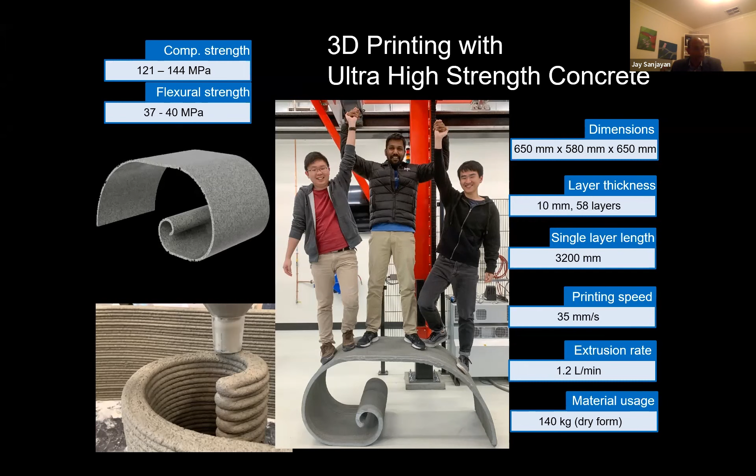So in conclusion, the digital transformation of construction offers many opportunities, but we also have a lot of challenges.

Reinforcements, to build overhangs - how do we build overhangs? So we looked at how people printing with polymers can print overhangs, because when the polymers melt and come out of the nozzle, they go hard immediately. But concrete doesn't go hard immediately. So this is something that we are working on right now.

Also in the future, we need to look at durability, design standards, and so on. But it's a little bit too early because we are still working out the technology. But 3D concrete printing is suitable for mass customization.

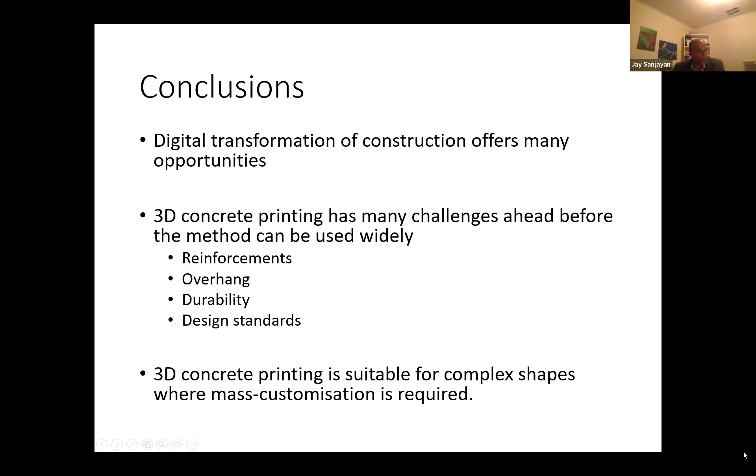But what we really want to print is interesting shapes. There's no point copying rectangular shapes. So these are some of the shapes printed by people around the world. This is a bridge in Netherlands. This is another bridge - most of you have seen it, I think in Venice. This one has very interesting shapes.

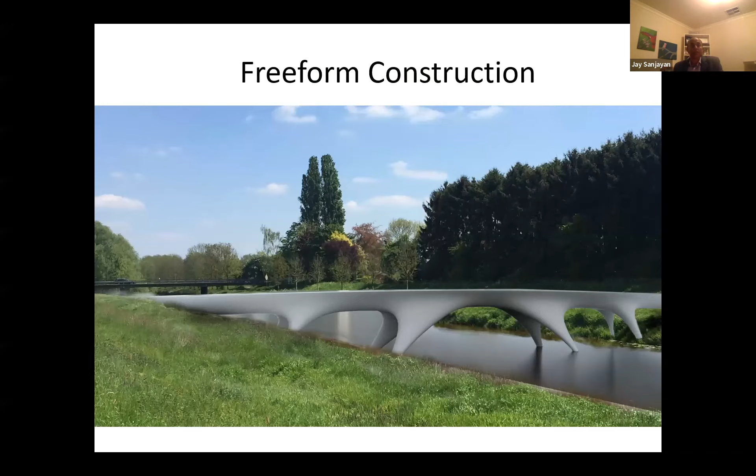Yeah, that's my presentation. How do I stop sharing?